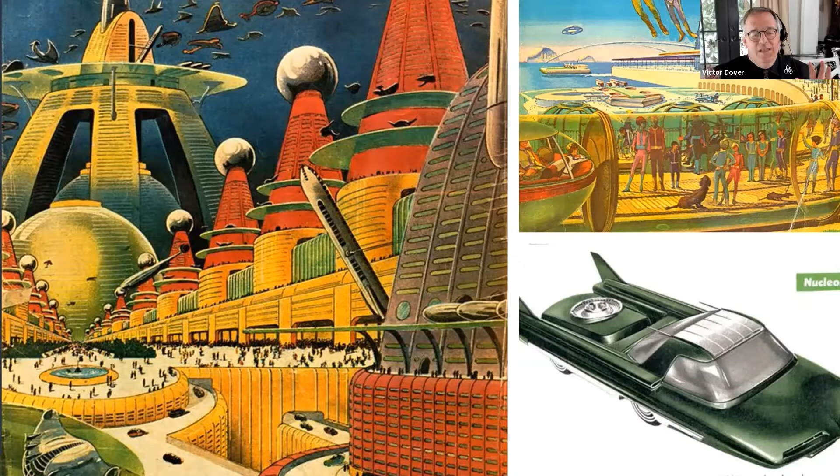Now, I'm going to talk about design, but I'm not going to talk about the giant unbreakable glass, plastic, and metal atomic-powered city of the future where we're all going to live under domes and have nuclear cars and that kind of thing. I'm a futurist, but I want to talk to you about a future that is a lot more doable and a lot more close up and maybe a lot more familiar than the one we're used to seeing from science fiction.

In our firm, we have a very interesting practice because we get to travel all over the place and help communities decide what they want to be when they grow up. So we kind of like to say we're in the before and after business, helping people realize what a great shared resource their cities and their city streets and public spaces are, and how that shared resource can be central to generating more human happiness and doing right by our habitat.

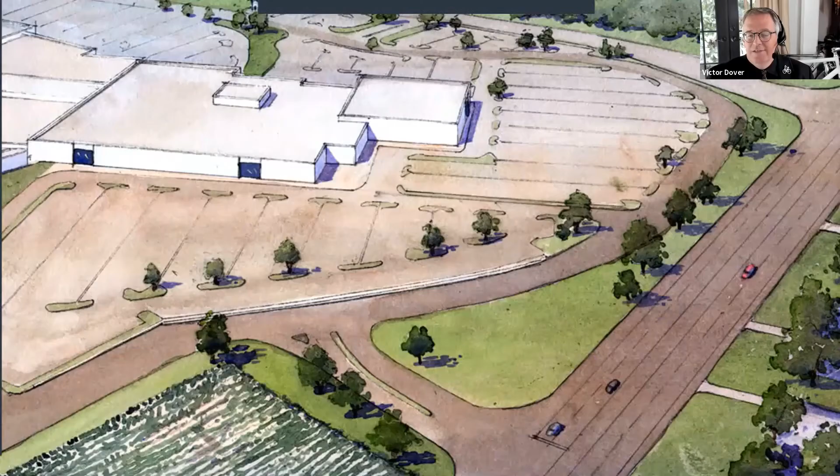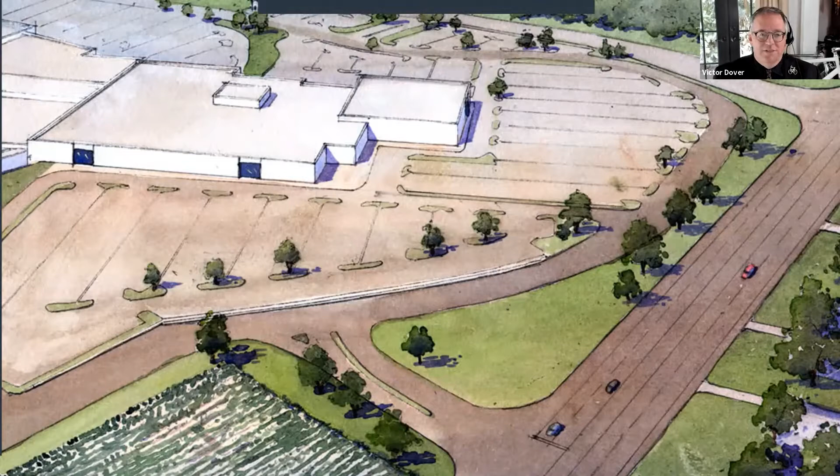So a lot of what we are asked to work on in this before and after business is helping people visualize how they might change the place that they've inherited into some place they could love more. So we do a lot of drawings, we make a lot of pictures, we do a lot of documentation of the way things are. Remember the Sears Auto Center and the big parking lot around the mall where those were. This is the city of the recent past, which turned out to be a pretty temporary and brittle economic prospect, a pretty coarse-grained way of doing human settlement.

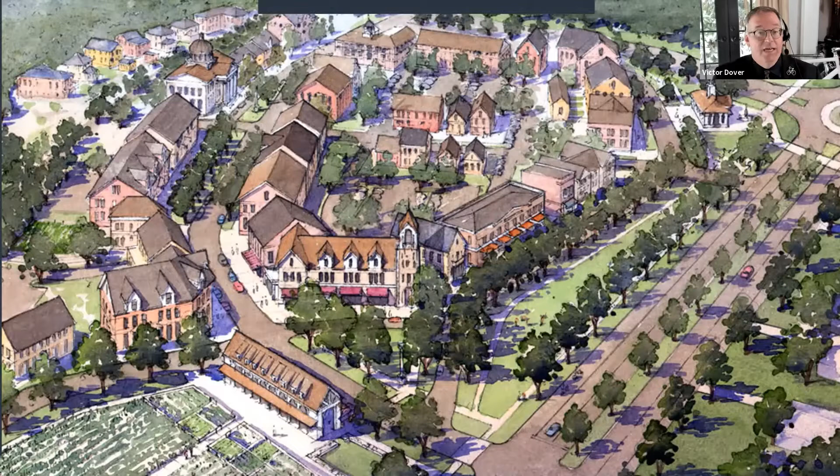And we help people visualize how land can be recycled, how communities can be revitalized, how change can make things better rather than worse, and also build on the resilience that comes from a small is beautiful approach, from having it matter more what kind of relationship you develop with that place and those addresses than, say, the land uses inside the buildings, as temporary as they may be.

And in our own practice with 22 people, I've learned to listen to the young people in our office, to take cues from them about where the world is going and what kind of world they would like to create. And one interesting thing to watch over the last few years is how one by one, we started having more and more of our staff arrive in our little office in downtown South Miami on 2 wheels or 2 feet or via transit.

And so the relevance of this for our climate discussion is that so much of our carbon footprint problem is related to transportation. And while some of that is freight moving about, and some of that is long distance air travel, of course, a lot of it has to do with the little trips we make during the day, going to and from our daily errands and work.

With the average household in the suburbs generating between 10 and 14 car trips per day, which have trended toward getting longer and longer, we make maybe 4 or 5 trips per household that are attributable to commutes to work, but a lot of other trips that the transportation engineers call discretionary trips. And those are the trips to get an ice cream cone or an Egg McMuffin or take a kid to piano lessons and that kind of thing.

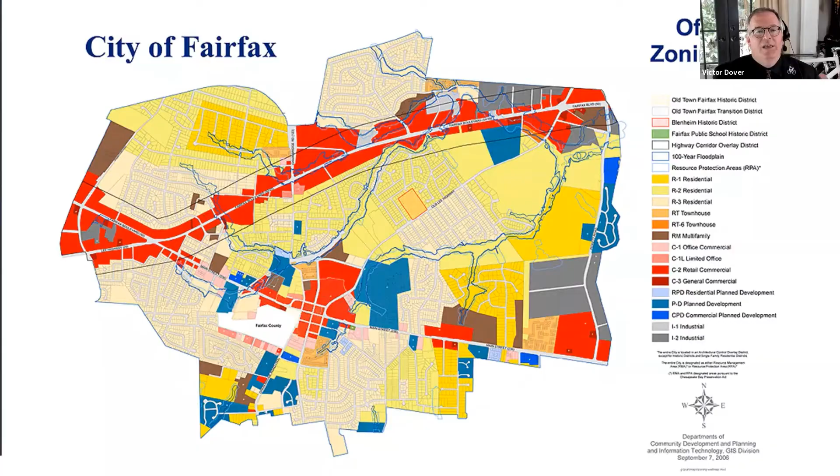So we do a lot of illustrations to get people thinking about this, in all the different ways that the benefits are interrelated. For example, if you have an unaffordable housing crisis, you probably also have a related transportation menu crisis where the cost of moving around is so great that part of your household budget you could use to deal with the rising housing costs is not available to you to do that. And of course, there are all kinds of cascading consequences from that.

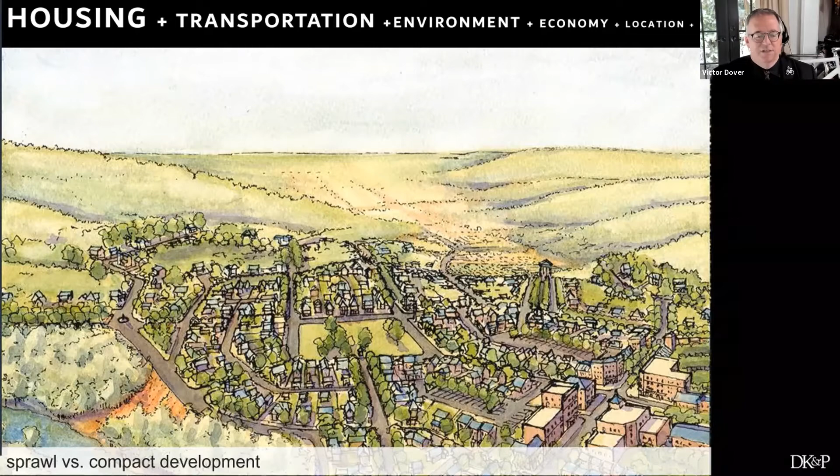Now, the good news is that changing this up is not something that we have to scratch our heads wondering if the market would support. National Association of Realtors and the National Association of Home Builders, very conservative organizations, routinely poll, and their surveys suggest that big percentages of people would be willing to pay even more than they already pay in order to get to a walkable community within walking distance between their home and parks, shops, and restaurants. 17% even suggest they'd be willing to pay a lot more.

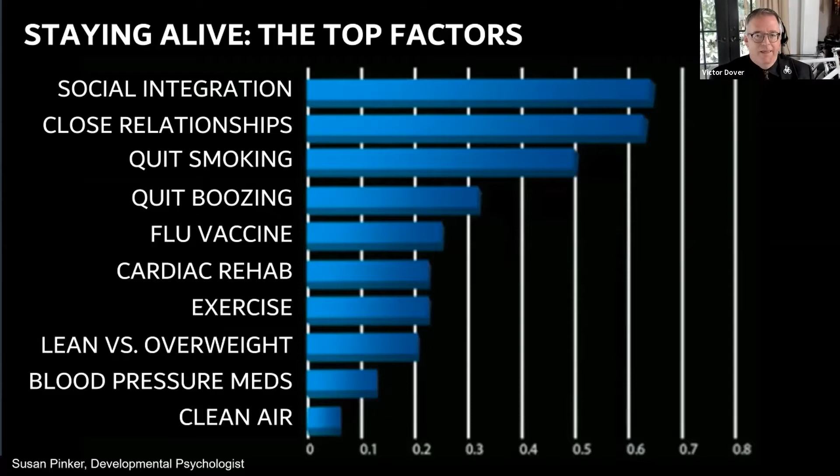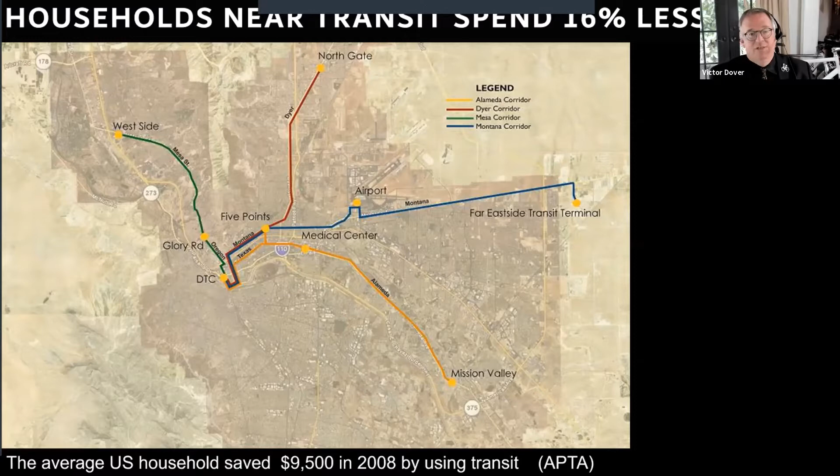Transit has lost a lot of ridership during the pandemic. We need to keep those transit agencies vital and alive and ready to not just keep working, but to expand when the pandemic is over. And that means spending money on it so that the households don't have to spend money on all those cars.

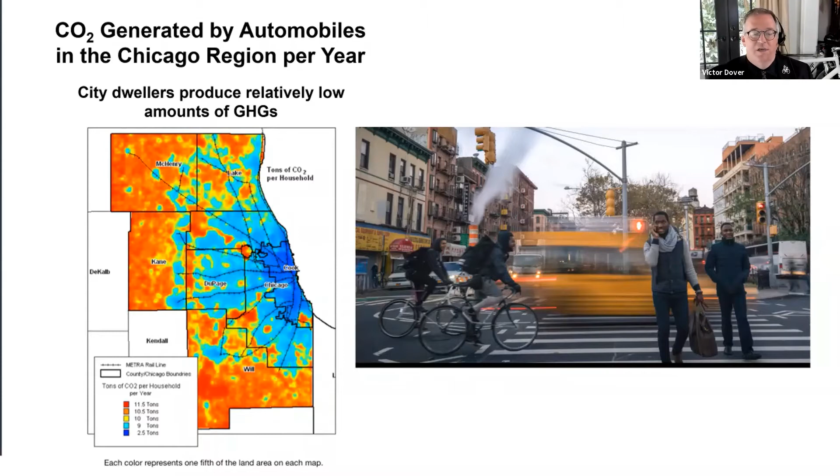There's an old story about how cities should be demonized for all the things that they do to the environment, like all that asphalt and all that urban heat island effect. But I love the chart on the left because what it really shows is that the places where per household and per person we're generating the most CO2 are the suburbs, where the trips are longer because of all that pushing of things apart. In the city, on the other hand, there's kind of built-in efficiency that goes from people using car share and taxis and transit, and from people walking and biking to their daily destinations.

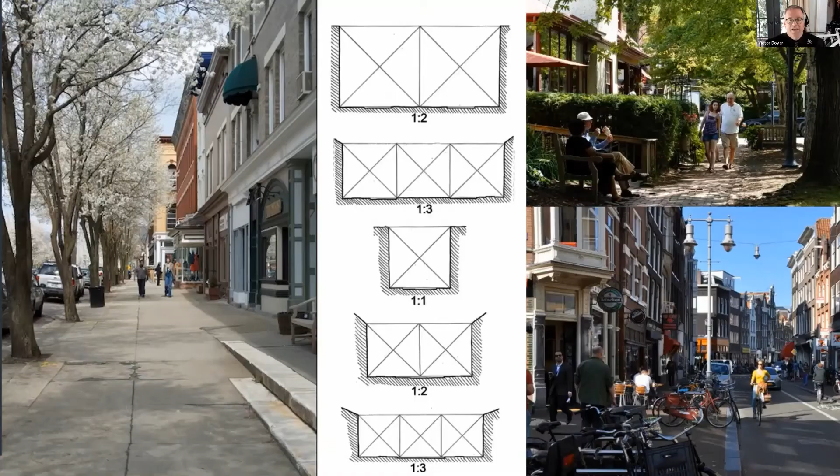The first one is that the streets where people want to be, as people habitat, have a shape. They will tend to have, defined through buildings or landscape, a kind of proportional relationship from the height of the things on the side, like buildings and trees, that are making the enclosure to the width between those things. And when the height to width ratio is reasonably comfortable, property values rise, people like to be in that space. When the height to width ratio gets too wide and the things are spread too far apart, the sense of place dissipates, property value drops. Now, remember the young lady in the yellow top on the bike in the picture of Amsterdam down below.

Second, the streets where people want to be are comfortable, and that has a lot to do with climate. For example, deciduous trees that grow leaves in the summer and filter the sunlight and make it shadier for you to walk along, lower the cooling costs inside those buildings, and lower the carbon footprint in the process, are part of the design. And in the winter, they lose their leaves, they let the sun come in at its lower angle and melt the ice on the sidewalk and warm the interiors of those buildings.

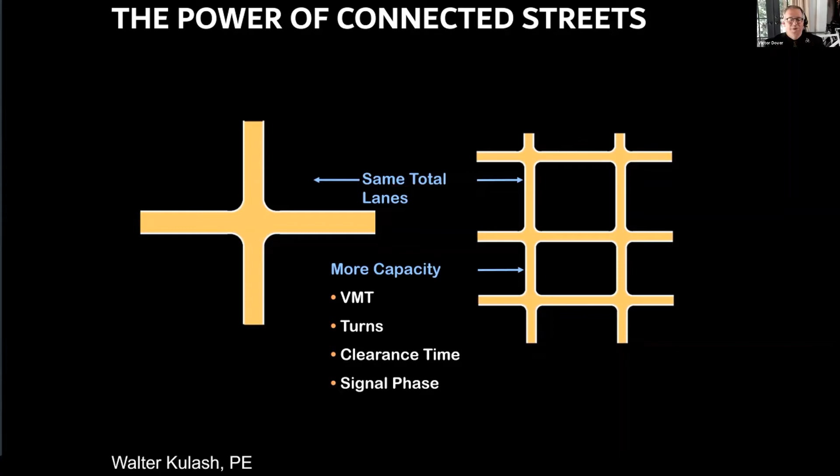Next, the streets where people want to be in successful cities worth recycling and regrowing are connected. They go somewhere. They go from where you are to where you want to be. And for those who wonder about this, let me just say, in short, two two-lane roads carry a lot more traffic than one 4-lane road. So if you're wondering whether this idea of a connected web of streets versus big, fat, wide, fast roads is going to hurt your ability to move around or hurt the efficiency and capacity of our traffic system, don't worry about it. A connected system has a lot more power to satisfy the demands for travel than a disconnected one.

And guess what? That same study I showed you before showed that when we have more intersections, more links and nodes, smaller blocks, the city is more like a web and less like a tree, then our driving goes down, our carbon footprint drops dramatically, just like it did with density or mixed use.

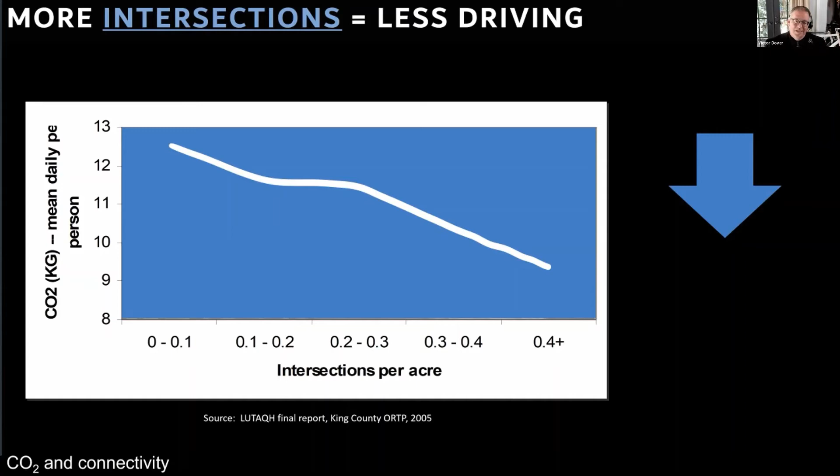Fourth, the cities where people want to be and the streets in them are safe. So the obsession over safety is crucial. It means you have to think that's the #1 priority, not necessarily getting somewhere a few seconds faster. A little bit of increase in speed greatly increases the likelihood of fatality when one of our motor vehicles collides with one of our squishy carbon-based traffic calming devices called people. And so at 20 miles an hour, every once in a while, 1 out of 20, there will be a fatality. But just at 30 or 40 miles an hour, a little bit more speed, there's a huge fatality rate as a result of speed. So we need to redesign streets for slower speeds within our walkable communities. Put the safety as the top priority.

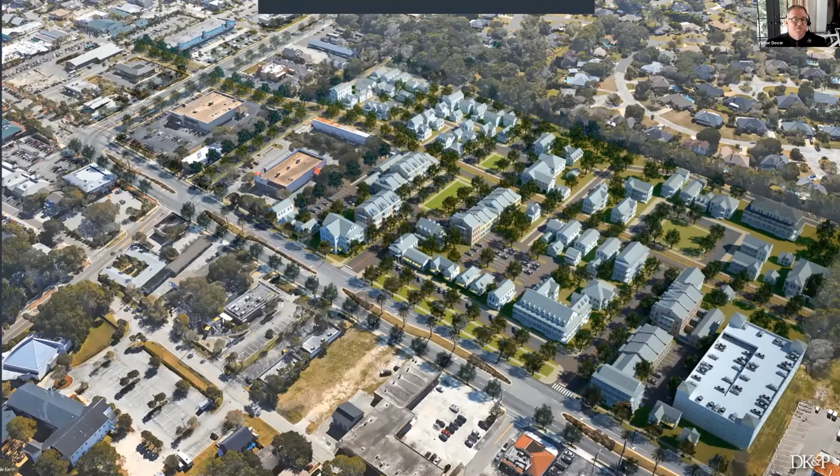You know, the folks over here in the cul-de-sac in the upper right-hand corner, they really don't want you coming into their neighborhood, charging in and saying, let's change it up, let's redo all this. But they probably don't love the arterial corridor, the strip commercial area, and they'd probably just as soon you figured out how to make one of those communities of the future there instead of where they have their house. And so there's actually a lot of room to grow new neighborhoods that have the characteristics I've been describing.

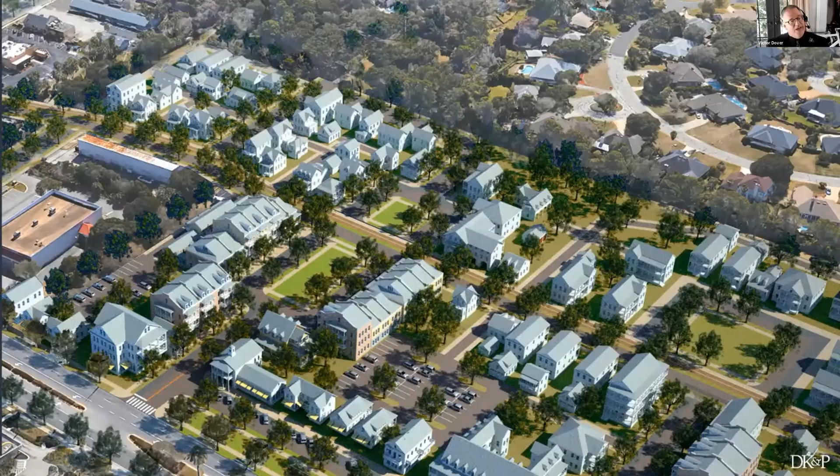They actually made a cultural decision to change up the way they were going to build and rebuild their city. They actually abandoned a model that was being sold to them by Detroit and said, why don't we be Amsterdam instead? And that has worked out terribly well.

Now, on the other hand, other folks will know about the success stories in New York, especially during the Bloomberg administration, where they made a lot of changes in the street and successfully took back a lot of space that was devoted to swirling vehicles and asphalt and made it people space again. And they'll say, well, we're not New York, we can't do that. And I will tell you, a lot of what New York did, they did overnight by using pilot projects.

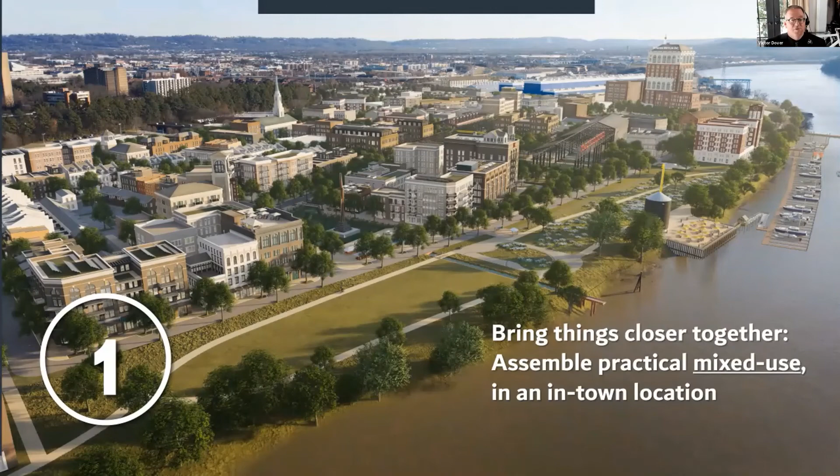First things first, bringing stuff closer together, getting that practicality from mixed use, doing so in town, giving people a chance to find things within walking distance, giving them livable streets and housing variety along with places to work so that they can live their life car light, if not car free. Part of that is remembering how to put things closer together. We used to do so all the time.

I'm talking about something Dan Parolek calls missing middle housing, which means doing all those things other than just the single family detached house on a large lot or the big condo in a mid-rise or high-rise. Things like duplexes and triplexes and courtyard apartments and row houses and live work units. That variety is coming back in a big way.

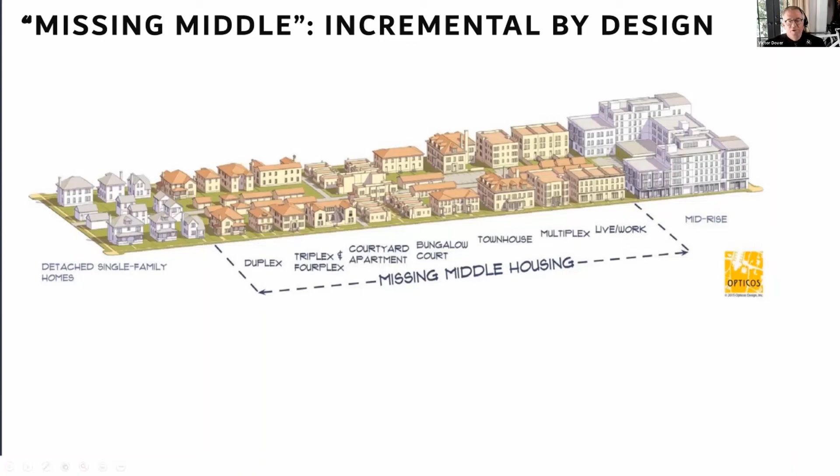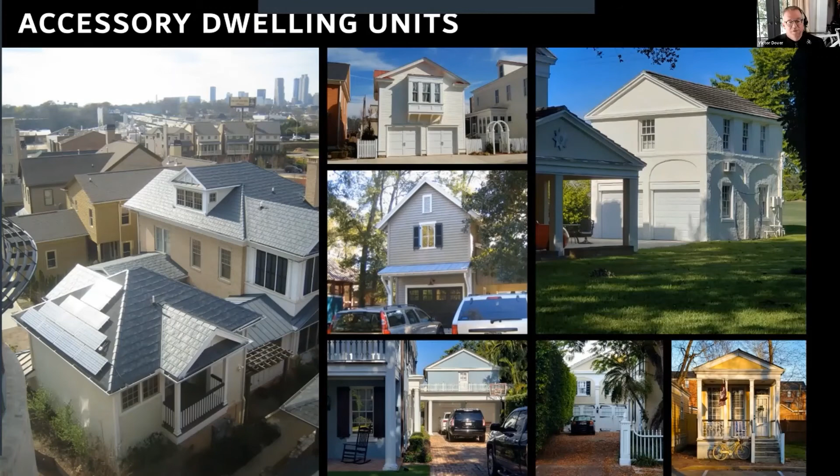So, for example, lowering the per unit land cost by attaching houses again, as we did during the high point in American city building, and mixing workplaces in small and gentle ways with places to live. What about the humble accessory dwelling units or granny flats, the so-called in-laws quarters that once were common and have in many of our communities been outlawed?

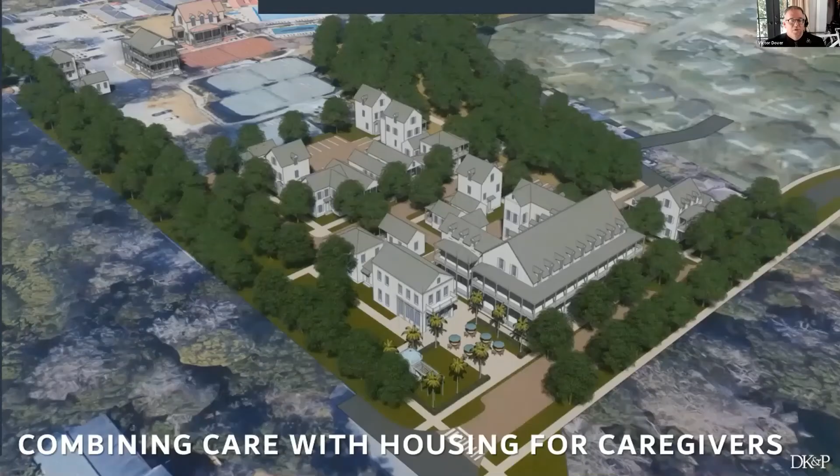And to be more ambitious, what about thinking about places where we need healthcare or assisted living, but doing it where we are also providing places for the independent living households and caregivers to live in the same neighborhood, instead of expecting our nurses or caregivers to travel long distances in their expensive car so they can go far enough away to get a house that they can afford. Why aren't we asking our caregiving complexes to provide housing for those receiving care and also those who are giving it?

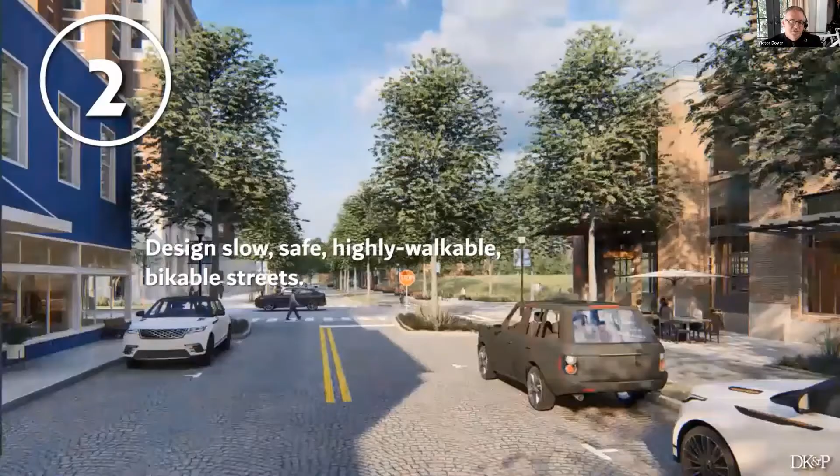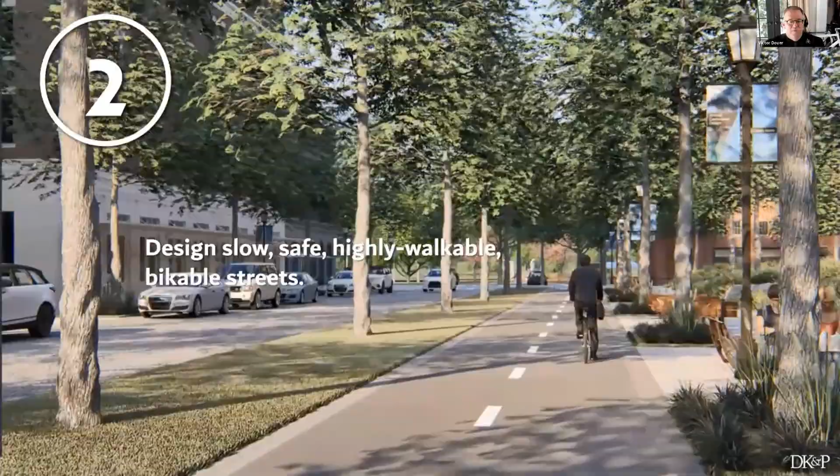Second, we look for highly walkable, bikable streets. This is the main street in Chattanooga. It's called Main Street. Runs through the south side of the successfully revitalized area, and it will reach the river along the route I'm showing you here next to some new office buildings. So, there's no question here that if you're wanting to bike, you could feel safe and comfortable doing so, even at all ages and abilities.

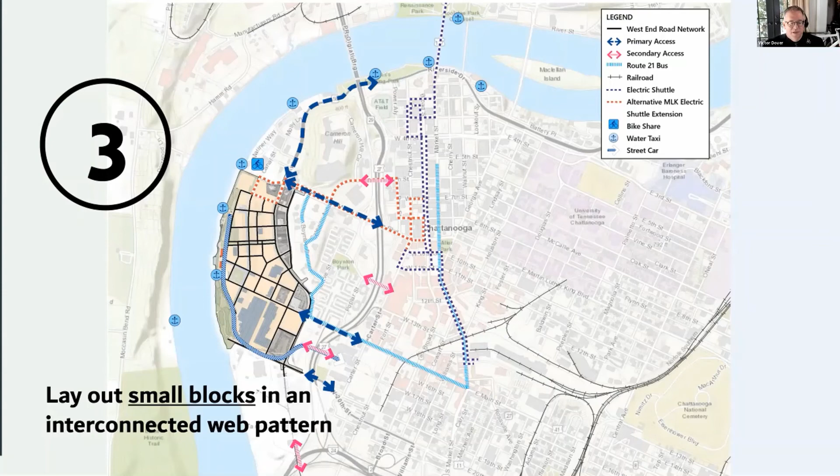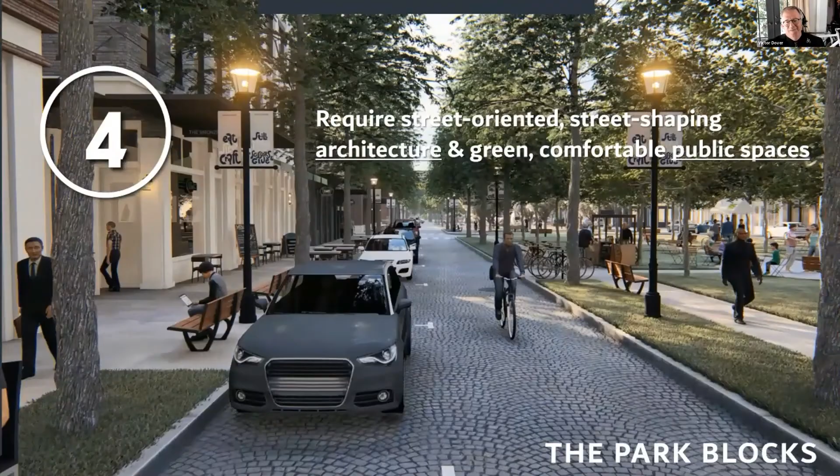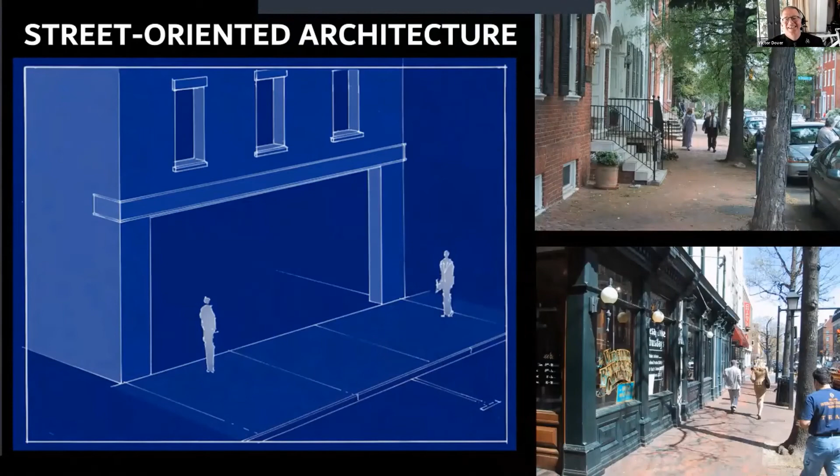I think this may be the most important one, and I'll just give you the end of the formula here, Lisa. The street-oriented architecture and public spaces where people are comfortable being. And that means actually designing buildings with doors and windows facing the street, balconies and storefronts, not blank walls, not parking decks. That is how we get people out on foot and make them comfortable in these spaces.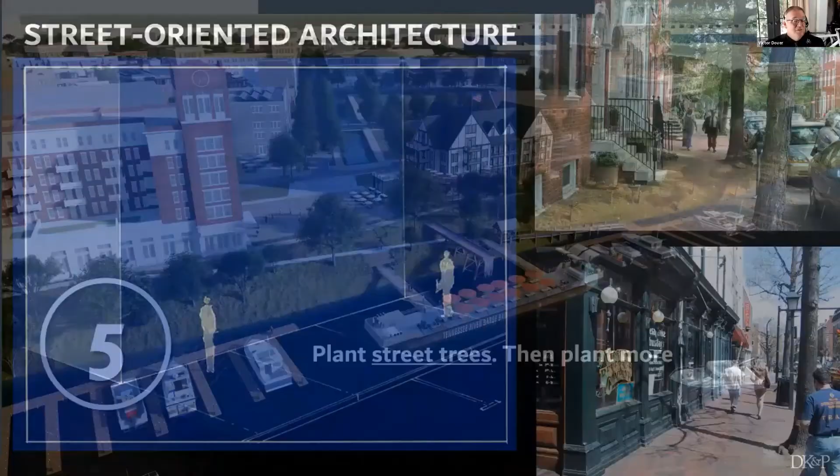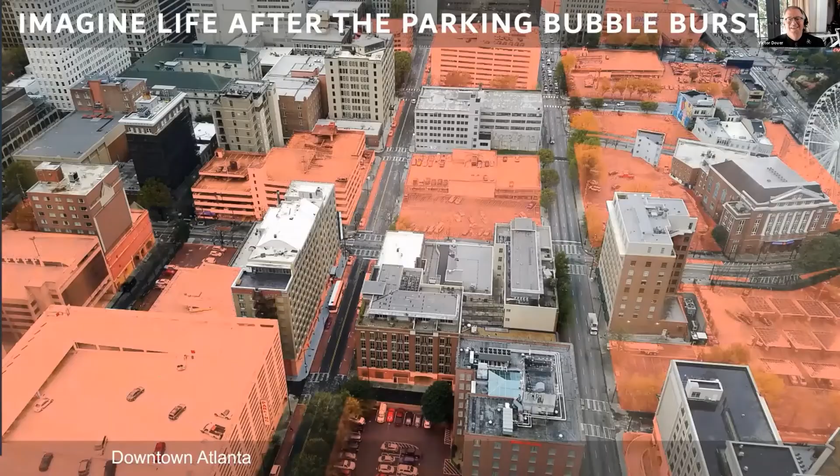And so Lisa, I'm just going to advance to the end of the formula and also paste it in the chat. You have to think about all the new technology. That's helpful. It's not the answer to the problem. The answer to the problem is finding ways to drive fewer miles and still have a great quality of life. The answer isn't finding ways to pack our cities with more parking, and think about how we use all that space when we don't need as much of it because of the change to car optional neighborhoods, and money that we can save as a result of doing that.